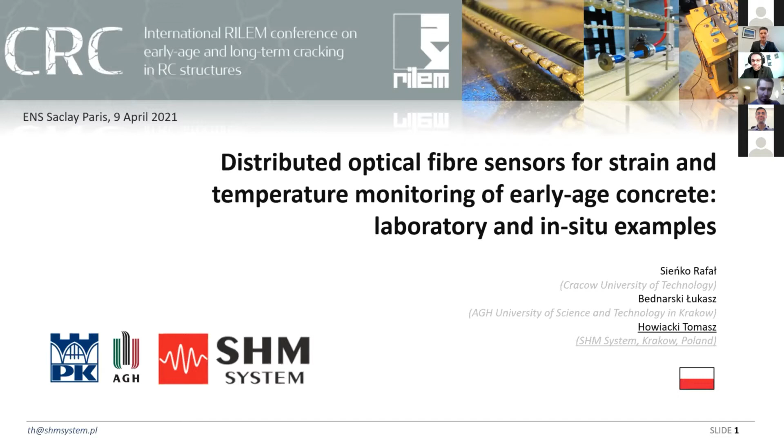I would like to say a few words about possibilities of applying distributed fiber optic sensors for strain and temperature monitoring of early age concrete, including phenomena like thermal shrinkage strains and corresponding cracks or micro cracks.

First, let's answer the question: what does distributed sensing mean? In the classical conventional approach, we select one point in the structure, install the sensor, and observe what is happening at this point over time. But thanks to distributed sensing, we are able to install a linear sensor and observe what is happening over the entire length of the structural member. We obtain a distribution of the measured physical quantity, so we are able to detect local events.

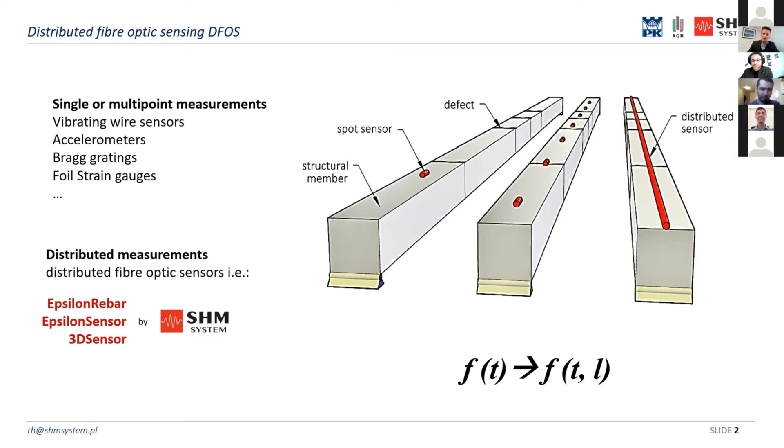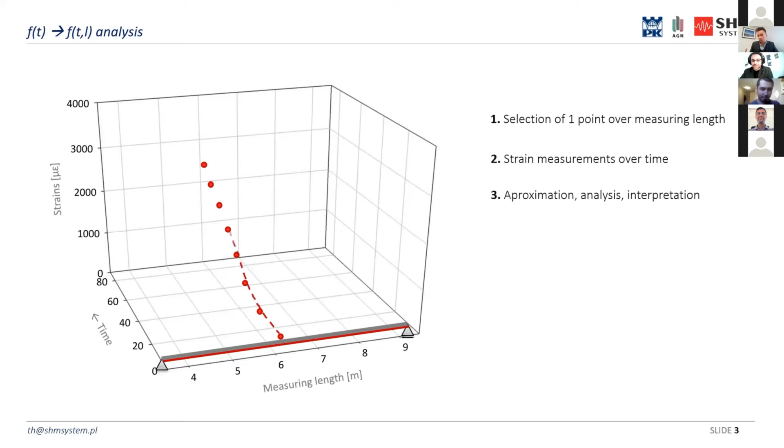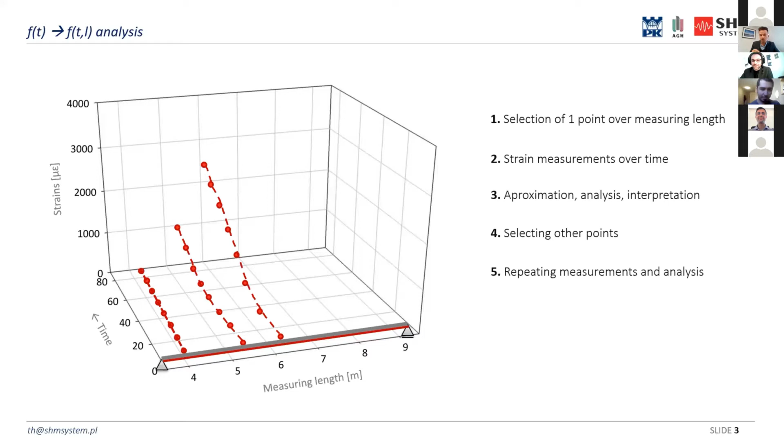Maybe it will be easier to imagine this process using spatial visualization. Let's consider a simply supported beam. In the classical approach, we select one point along the structure and observe what is happening at this specific point over time. When we want to improve the quality of our analysis, we can install more sensors and repeat this process. However, we will not be able to gain knowledge about what is happening in the structure between these points. But thanks to distributed sensing, we can observe the strain distributions in time and length domain, identifying all local events, defects, and cracks. Using even a lot of spot sensors, we are not able to achieve this.

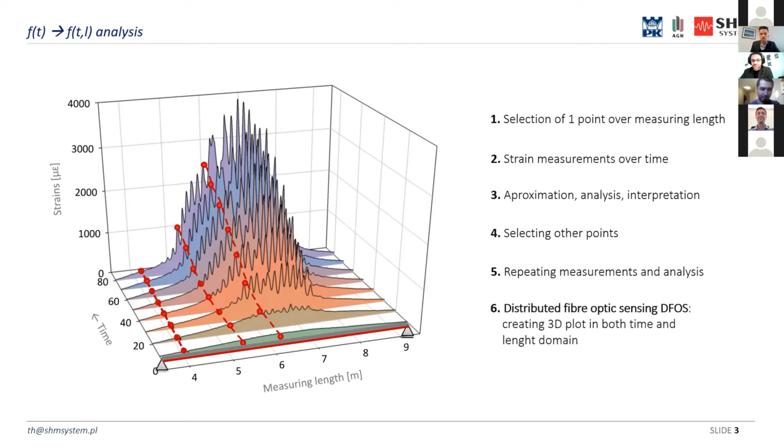Using this approach in our research, we wanted to answer the questions: is there a possibility to measure directly the cracks pattern, including not only locations but also estimation of crack widths? Are we able to measure inside the concrete, not only on the surface, but without disturbing the structural behavior of the concrete, because the presence of the sensor itself can somehow disturb the structural operation? And can you measure in any direction? I would like to answer these questions based on real case studies, real practical examples, because I think this is not only the most interesting, but also the most valuable.

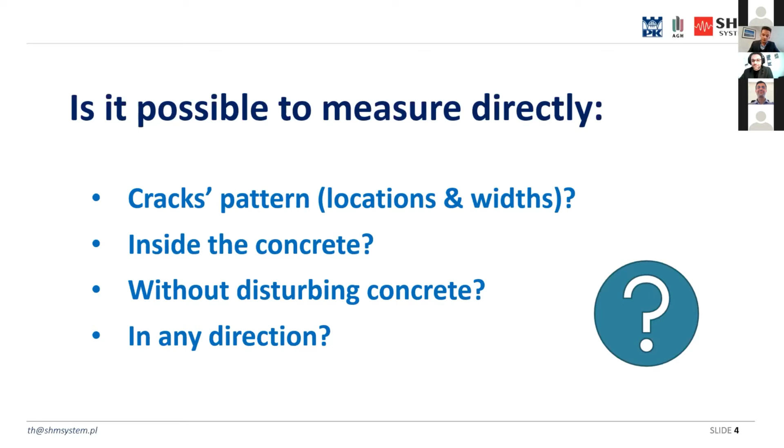But the first step to answer these questions positively is to use appropriate measuring tools dedicated for these purposes. When we think about laboratory examples, we usually use pure optical fibers with different types of coatings, and we have to choose an appropriate coating to ensure appropriate cooperation between the sensor and the measuring structure.

For example, here you can see the influence of time on these coatings. When we use acrylate coating, this influence is negligible. But when we use polyimide, we will destroy the sensor itself due to the alkaline concrete environment.

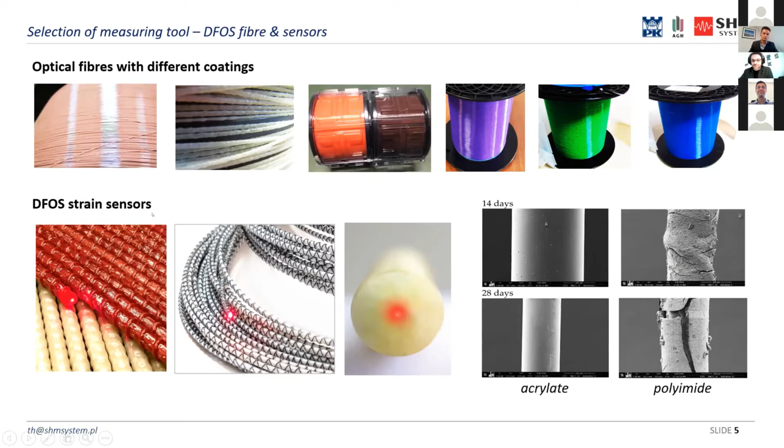For laboratory examples, but also in situ installations, we should use appropriate sensors which are designed and dedicated for these purposes. The main task for such sensors is to transfer strains from the concrete accurately to the sensor, and we should ensure monolithic structures. We cannot use cables with layers, with intermediate layers, which disturb this transfer. We should use high flexibility sensors with low elasticity modulus, so they cannot act as reinforcement for the concrete. They should be invisible to the concrete.

We should use composite rather than steel or plastics, which have a very limited elastic range. When we're thinking about measuring cracks, so when we have locally very high strain values, we should be able to withstand this, and we should provide good integration with the concrete through an appropriate external surface. So this is the first step which we should do.

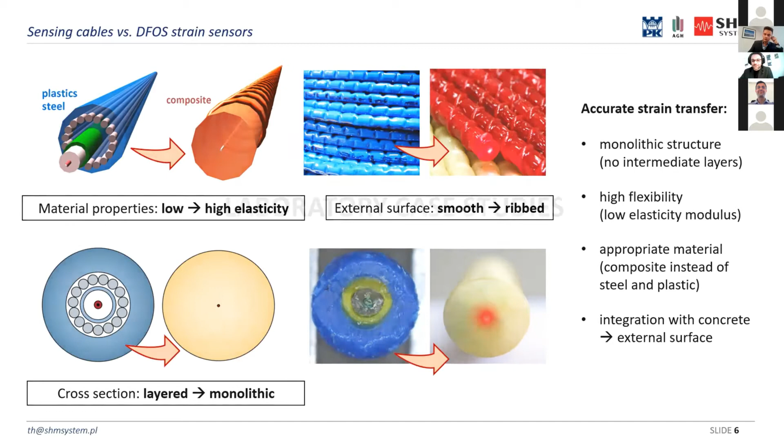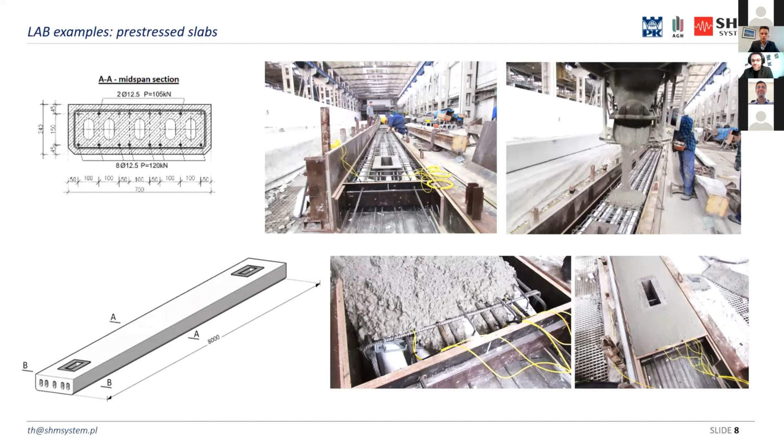Now let's move into the real case study, and let's start with laboratory examples. In the first case study, we analyzed the behavior of pre-stressed concrete slabs. Here you can see some photos from the production hall, from installation time. We installed two types of sensors. The first is epsilon rebar, which was embedded inside the concrete along the main tendons. These sensors were used to make measurements during early age concrete, during the first days after concreting.

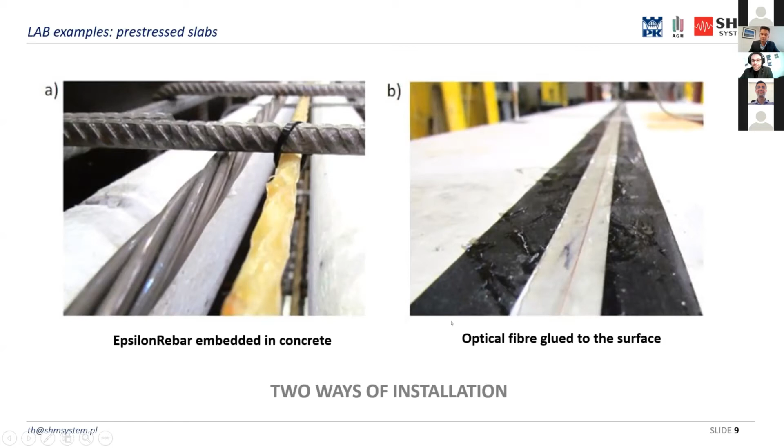After hardening, we installed pure optical fibers on the surface, used also for mechanical bending tests. These sensors were installed both in the upper and lower part of these slabs.

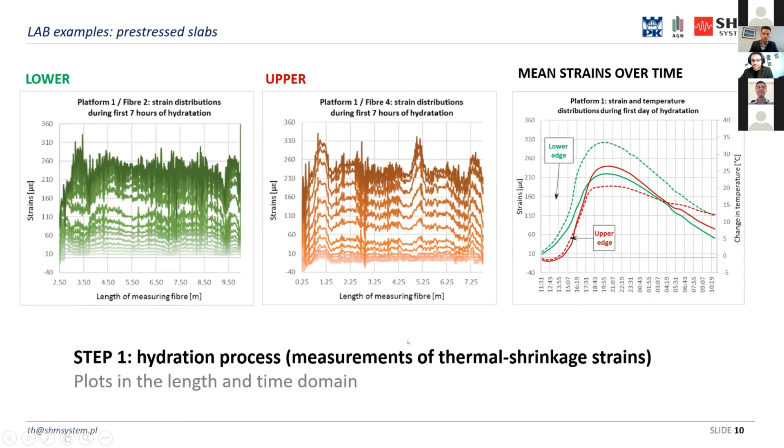The second step was mechanical loads testing in the laboratory at Krakow University of Technology. Here are some exemplary plots with the first four load steps and compression zones, the upper part, and tension zone, the lower part. We can see that only in the first step were the slabs under uncracked conditions.

Later, we were able to identify all cracks, and what was interesting, we were able to do this even before the cracks became visible to the naked eye. So we were able to predict the places where cracks would appear during higher loads.

Here you can see the same plots, but during the entire research up to destruction. We obtained extremely large cracks, and we were able to measure them up to the point of failure.

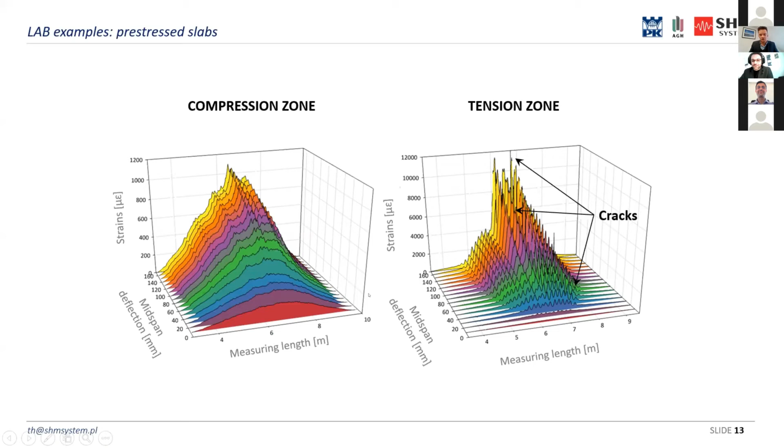Another example from Leibniz Universitat in Hanover. Here we analyzed textile reinforced concrete specimens, and the optical fibers were placed directly into the concrete, but also glued to the textile.

By making measurements during the first days of hydration, we were able to obtain profiles of strains in the length and time domain and compare directly what is happening in the concrete and in the textiles. We are able to analyze the interaction between these two elements.

Please notice that here we used fibers with a 0.2 millimeter diameter, so it is invisible to the concrete and doesn't influence its behavior.

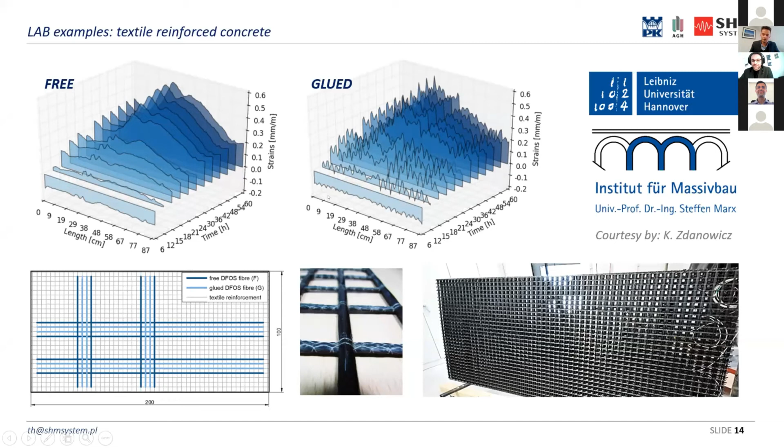Another example, which should interest those focused on massive structures where hydration heat plays an important role: we analyzed, as part of some R&D research, the behavior of a concrete cube equipped with optical fibers placed inside in various directions.

We were able to obtain the spatial visualization of strains in all directions over time. Here you can see the plot just for one section, but we have many of them. We analyzed both strains of the concrete and temperature using fibers placed freely inside the cubes.

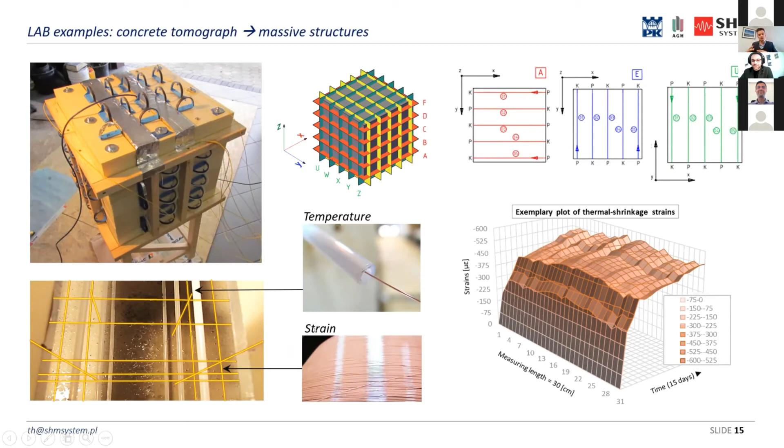So they were isolated from mechanical strains.

We had a lot of experiences and case studies, but I do not have time to discuss them all in detail. We analyzed specimens made of reinforced concrete, pre-stressed concrete, light aggregate concrete, and fiber reinforced concrete. These specimens differed not only in material but also in geometry. Using appropriate composite sensors, we were able to analyze the early age stage, including cracking and micro-cracking.

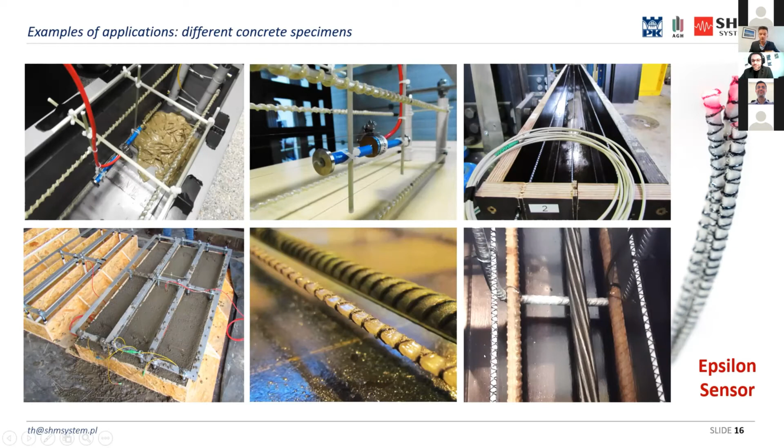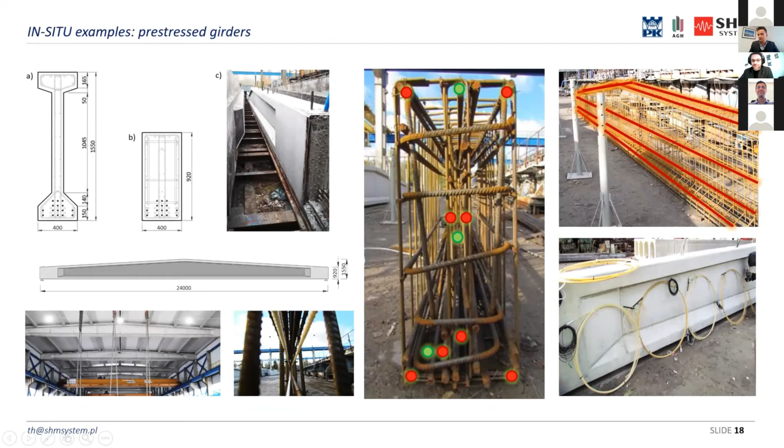Let's move now into the in-situ case studies, and let's start with pre-stressed concrete girders with 24-meter length. Here we installed a few epsilon rebars along the entire length and observed what is happening during early age concrete, so during hydration time. We were able to identify all local micro cracks which appear during this process due to the constraints.

But what was extremely interesting and important for designers, we made measurements also during pre-stressing and activating the dead weight of such girders. We can see that all micro cracks which appeared earlier were now closed. This was valuable information in the context of durability and operation and performance of such girders, which are now operated in one of the Polish production halls.

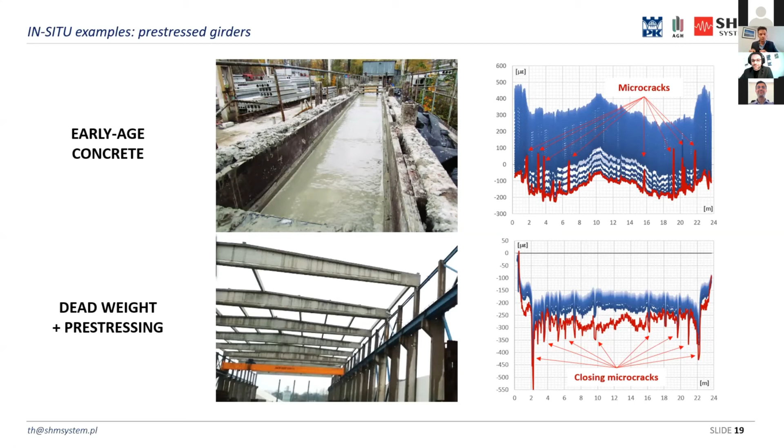Another example now from geotechnical application and slurry wall. When we made measurements after execution of such a wall, we were able to identify the strains over the entire depth of such wall and identify shortening caused by thermal contraction and shrinkage. But due to the existing constraints, because of the cooperation of the slurry wall and the surrounding ground, we were also able to identify all micro cracks.

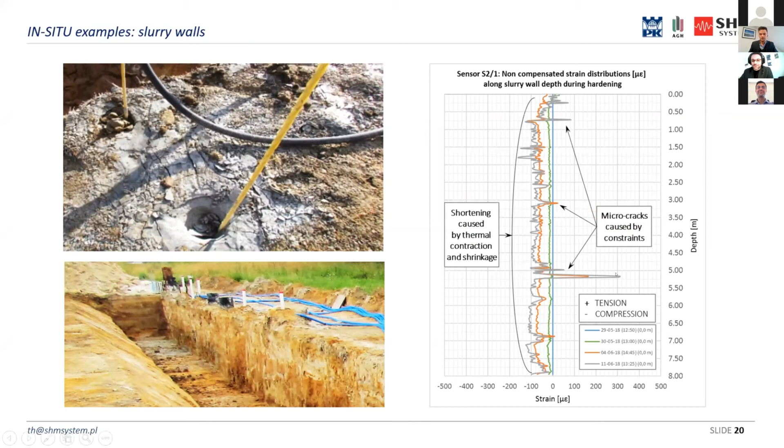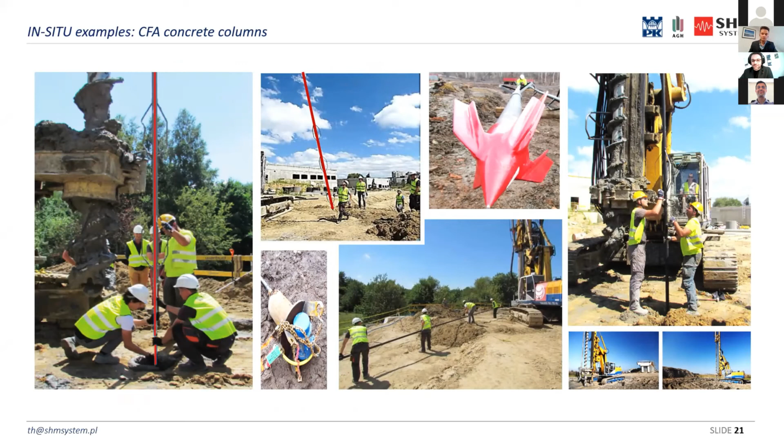Another example, quite similar to the previous one, is a CFA concrete column. Here you can see some photos from the installation process, which was quite interesting itself, but obtained results. We made measurements during hydration process, and results are quite similar to the previous one. We analyzed shortening caused by thermal contraction and shrinkage, but also micro cracks caused by constraints. We identified also local extremes, which were related to imperfect geometry of this column.

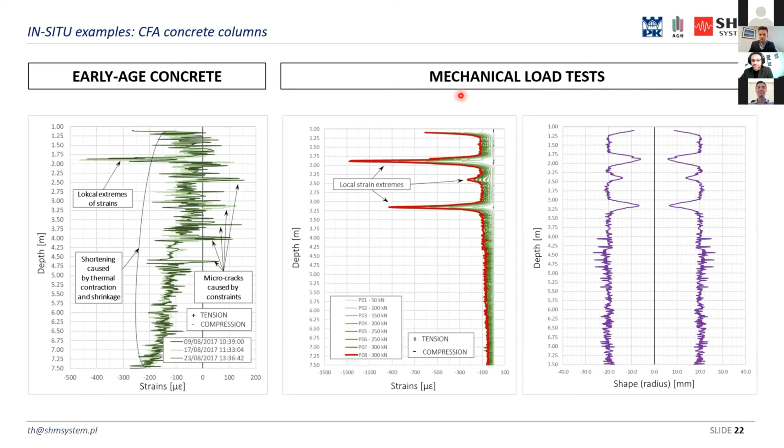And these early age concrete measurements were later confirmed by the analysis of data from mechanical load tests, as you can see here on these plots.

Another example is a 100-meter long section of highway, an experimental section, which was reinforced only with composite rebars, and it was concreted along this entire length without any dilatation. So the knowledge about the crack state was extremely important for designers.

Thanks to the technology of distributed fiber optic sensors, we are able to identify all local cracks over the entire length, and we were able to distinguish between cracks which were very close to each other. It was possible thanks to the good integration of the sensor and the concrete, and no slippage phenomena between the concrete and the sensor, which was monolithic and has no layers interacting with the structure.

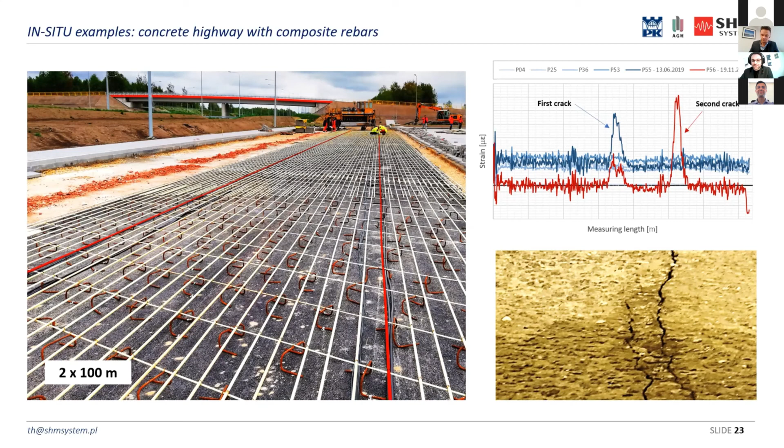In this case, these sensors have a double function in the structure. So they are not only the distributed sensor along the entire length, but also structural reinforcement.

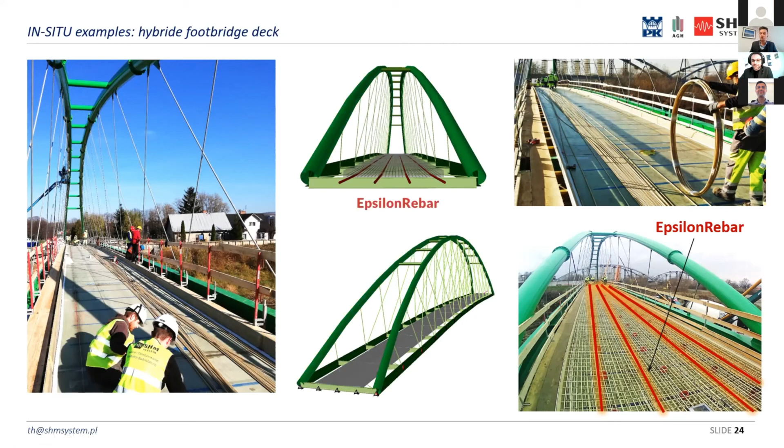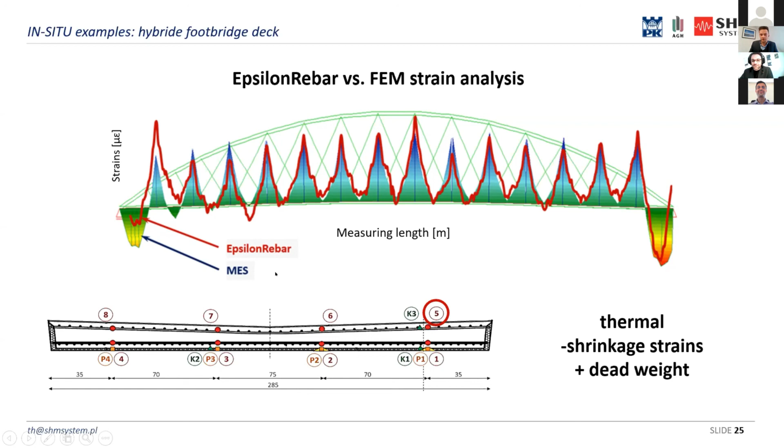And here you can see some results in the form of strain profiles over the entire length in comparison with finite element analysis. These strains come from the thermal and shrinkage phase, and also from activating the dead weight of the slab. We can see that, in fact, there is no crack identified here, but the shape of this strain profile was caused by the static scheme and supports of the deck.

Okay, let's move into conclusions. The knowledge about early age concrete cracking is extremely important, and sometimes in practice engineers are focused on cracks which come from mechanical loads, but this early age concrete cracking is extremely important because it influences the long-term operation and durability of concrete structures. The knowledge about them allows us for optimization of both design and technology process, for example curing or pre-stressing technology, and also allows for verification of standard requirements, for example crack widths, not only on the surface, but also inside at the level of the main reinforcement.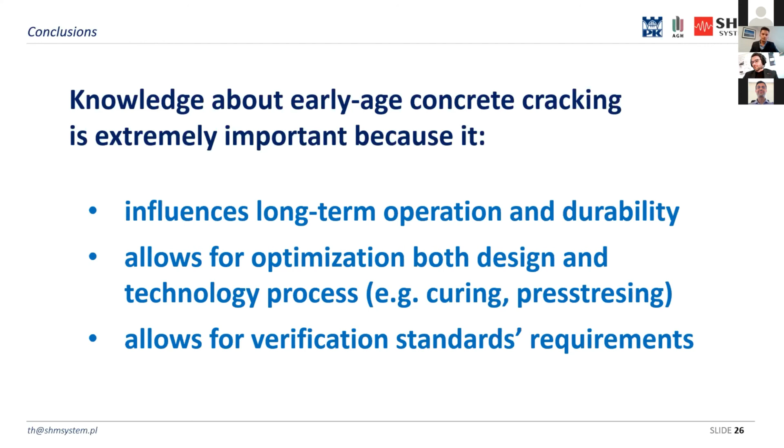And in life and in engineering, the biggest risk is always what we do not know. Thanks to distributed fiber optic sensing, based on appropriate composite and monolithic strain sensors, we are able to look inside the concrete without disturbing its behavior and observe phenomena which are still invisible to other measurement techniques.